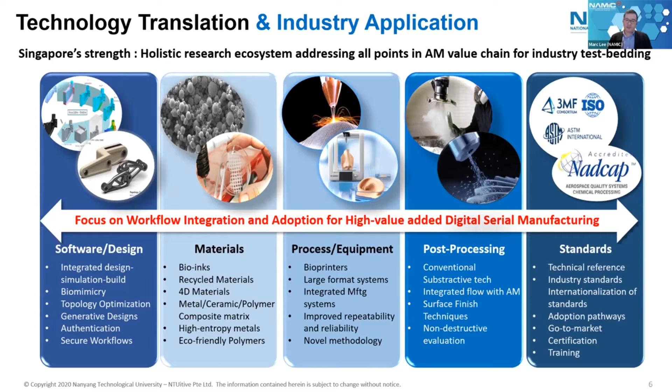Standards development is also another area which is strategic for the various domains, because only through standards development will demand by end users increase, and correspondingly, the supply will increase and the price for AM will drop.

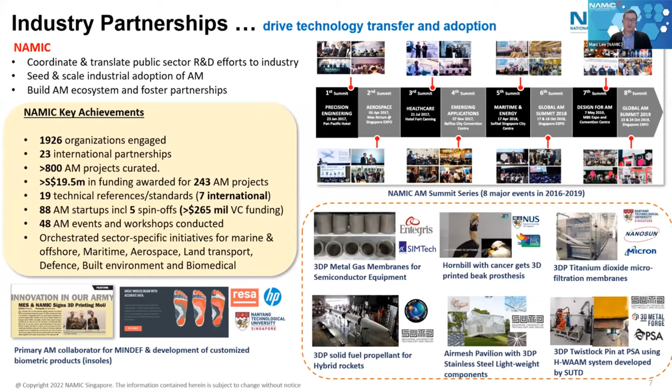NAMIC has also engaged in multiple industry partnerships. The main aim is to coordinate and translate such public sector R&D efforts, and eventually scale the industrial adoption.

The outcomes highlight all the various qualitative values we have created across various startups, enterprises, and MNCs. You could see the progress within the AM ecosystem from sectors such as M&O, maritime, biomedical, aviation, MRO, and semiconductor sectors. This shows the gradual AM adoption which is gaining momentum in Singapore.

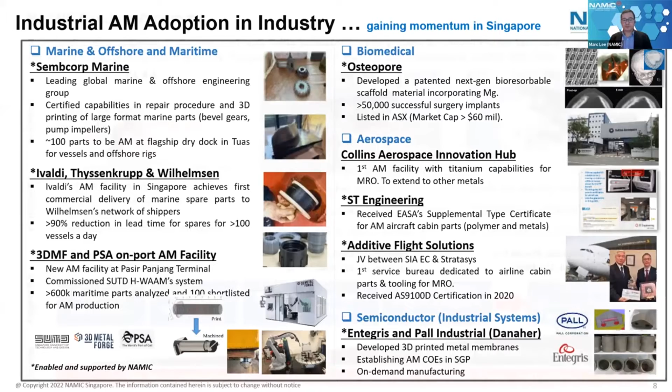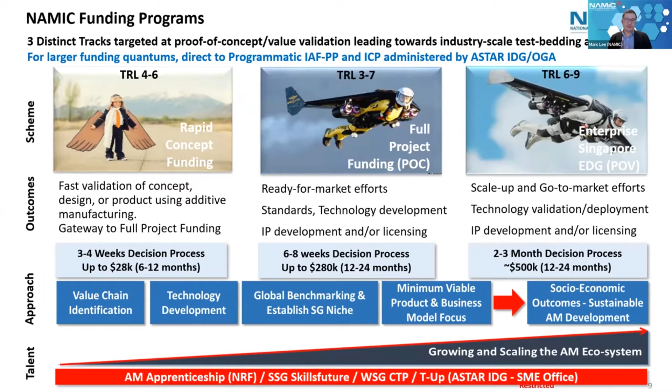In order to help Singapore-based businesses towards adoption at industry scale, NAMIC has various funding tiers for Singapore-based companies to perform R&D into these areas. The three tiers of co-funding are targeted at proof of concept and value validation.

NAMIC is constantly organizing various events to bring thought leaders and industry together. Pre-COVID, NAMIC would hold two AM summits per year, inviting international speakers. We also take part in various exhibitions within Singapore, once in May and once in October, as part of ITAP, as well as organizing the Startup Innovation Forum, which was held late last year.

It was a very refreshing restart to the MICE events for NAMIC, and we saw a very good turnout and very good interaction during the session. So with that, I've come to the end of my opening, and thank you for your attention.

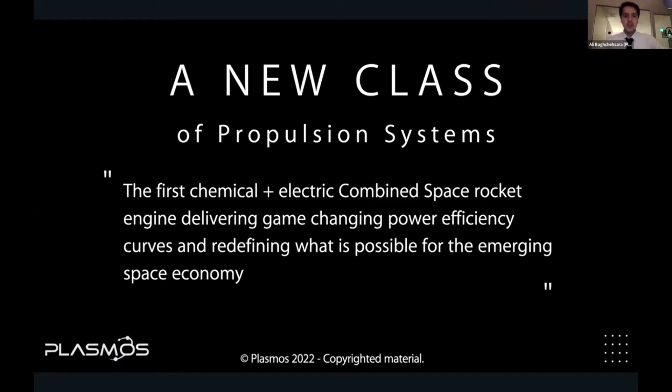But electric propulsion has been a rather new realization in terms of its capacities, being practical, being on satellites from Astrium in 2009, which was actually led by another team member of mine, Alan DeMeyer, at the time, or systems launched from the EP side in the last couple of years on OHP, which he was again leading, or smaller electric propulsion systems used for CubeSats and fairly small satellites. But what we are really doing is to combine these two for a new purpose. The good thing about an electric engine is that you can maneuver, you can run them for almost 6-7 months, go on deep space missions, and so this is a fantastic thing to have.

However, the problem that you have with an electric engine, and I'll get to it later on, is that it has a very small scalability. So you cannot scale the thrust of it that much. It only produces in the order of micronewtons, so much that you can hold the toilet paper still in Earth gravity. But what is the use of making a new type of engine like the one we are making, what we call CLEPS, Combined Liquid Electric Propulsion System?

And then we are coming in the game to say, okay, we can take it from here and go to a further destination, whether that's LEO, MEO, or GEO. So let's say go beyond. In second stage or third stage, so from a typical launch standpoint, when you go to lower Earth orbit and you want to go to higher orbits, that's also where this engine can be useful, just because it produces a certain order of thrust, like from 1 Newton to 25 Newton. I'll get to that as well.

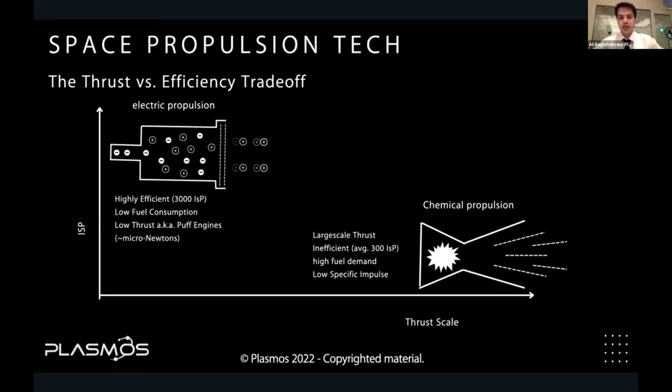On average 300 seconds ISP, it can be even higher, 350. But you cannot really go that much higher than that practically. So this fuel demand is really annoying when you want to say, okay, I want to use my satellite to go to another orbit, with constant refueling with a fuel that is not really available. However, in electric propulsion, you have access to, let's say, the solar panel. So what we are trying to do is to combine these two. Of course, I cannot get into so much detail of how we are combining these two things. There has been quite a long time of research despite just 6 months of operations of the company.

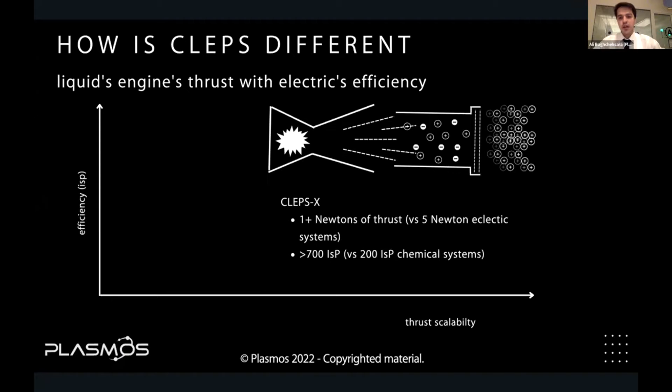Even some of my team members have been working on this more than I have been alive. So it's definitely an interesting journey to start and take practical steps very fast. And just to give you some key performance indicators, more than 700 ISP is what we are targeting to create, more than 1 Newton of thrust versus 5 micronewton. Sorry, micro is a word missing there in the electric. Electric is even written wrong.

But the complexity of producing such an engine is extreme. I wouldn't say I or my team are the first ones to try this out, but we are definitely the first ones to try it out this way. And by this way, I'll get more into it. But our engine has many layers to it. I'll get a little bit more into it.

So you can just see a little bit of this from the coils that are inside, from the specific cooling system. We cannot take the cooling systems and the methods that you can use to cool the entire engine of a normal rocket system, as is being done on the BE-4 engine, on Relativity's engine, and many others. We have to really take a different approach on those things.

Not that I know of those details, but very specifically, we cannot have a symmetric cooling system just because we have a very high temperature point at a very specific point of this engine, and that is more than 1,000 times hotter than anywhere else in this engine, which is making the manufacturing of it, making the cooling system, very weird.

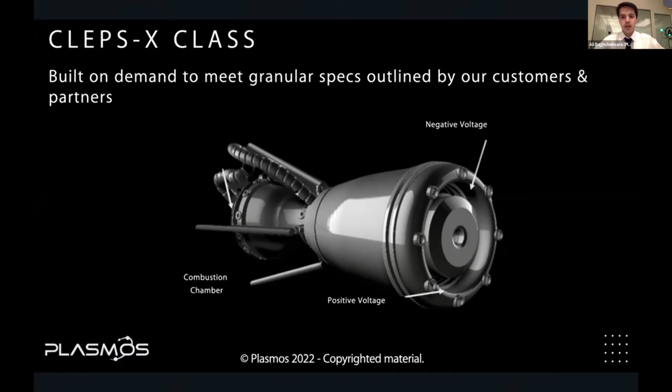So just one more thing, considering the cost of production and the operational aspect of a company, but also the operation of this engine, we are intending to have this engine made in a way that you can operate it more than 24 hours. Given that every spacecraft is different and manufacturers in the space industry are doing everything more or less vertically, we want to break into that vertical integration standpoint. So we are making a flexible system.

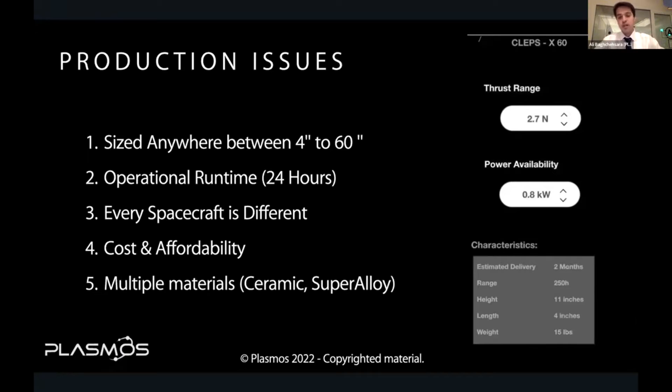When you talk about production, the traditional ways in CNC pressing, even small materials, small tubes, it's going to be extremely difficult if you want to scale for every single client up and down. But when you talk about additive manufacturing, things become slightly different and hopefully easier as we are entering production right now. We also have multiple materials, which is another topic for us. And of course, we want to have these engines made nice and high quality, affordable, but also reliable.

So I mentioned some of this layering. I just want to show you what I mean. We have a high voltage. I mean, when you go to some facilities and there is a nice sign that says danger, that's not going to end there for us. We have to really build isolation in there. Mark and I have had interesting conversations overnight about what technologies are available, what kind of material can be used on top of the things we want to print in superalloys, because that's not going to be electrically resistant, so that we can isolate things.

We are going to have coils inside the engine because we have to have a magnetic field. There is, as I said, one point where, just to give you a rough estimate, we are going to have more or less as much thermal pressure as you can imagine from 3 guys sitting on one piece of plate, making arcs there and welding something. That's how much we have on a very small fraction of our engine. So cooling it is extremely challenging and very different.

Our cooling system, when some of the experts look at it, they are like, geez, this looks really weird. And of course we have multiple layers of different things. So it's basically 2 engines made in one. That makes the production, of course, very difficult. However, we have come a long way.

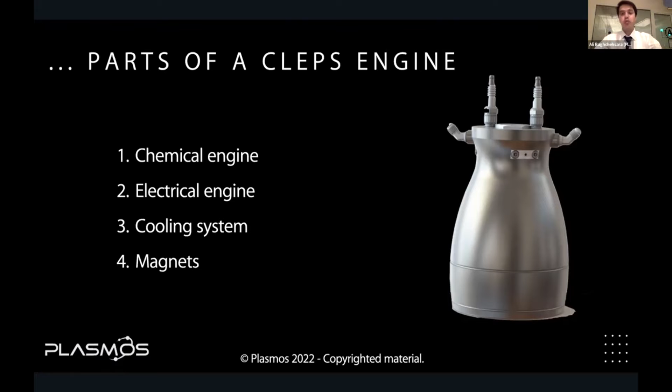So just to wrap up some of the difficulties that I was mentioning: the cooling system, the magnets, and both electric and chemical engine. You might have seen how crazy an engine for rockets looks. This looks so simple, and yet it has to have all of those elements inside it, because we are looking to have it a lot more integrated, just because we are starting from a green field.

And as I said, we just started legalizing our company about 8 months ago, September last year. But very recently, a former CEO of Airbus Defence and Space, a guy that I personally and professionally adore, has decided to join us as a chairman. So we have been making quite fast progress, both in terms of building a team of about 10 to 14 people, both advisors and others, but also really making progress in terms of designing something that becomes a reality

and not just a presentation. I remember last year I told Debra Werner, the same journalist that interviewed me, that I want to have a prototype before we start fundraising. And I'm very happy that I could keep that promise, as our fundraising just started on Wednesday last week. So it's almost a week, and we have been quite successful so far, raising a couple of SAFE notes, and we will hopefully push the boundaries in propulsion for space and going beyond. So I stop here.

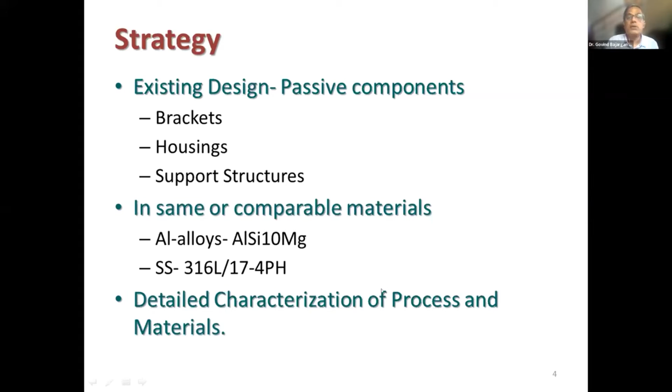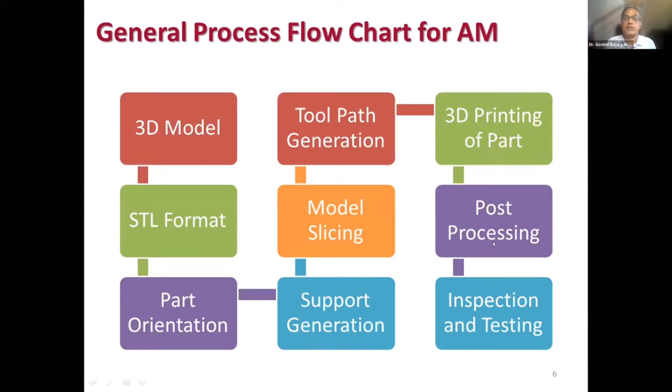So before going into our plan, let us just see briefly the flow chart of the AM process. The AM process, as all of you know, involves a 3D model which is converted into .STL format, and subsequently we decide the part orientation, support generation, slicing of the model, tool path generation, then 3D printing, post-processing, and the final inspection of the component.

So in STL generation, when the 3D model is converted into .STL format, the CAD model generally contains geometrical and topological information. But in STL, we lose the topological information. Only geometrical information is available. What STL does is it converts the whole surface to triangles, and it is denoted by the coordinates of the 3 vertices of the triangle, as well as the facet and facet normal. This is how the STL format designates the whole model.

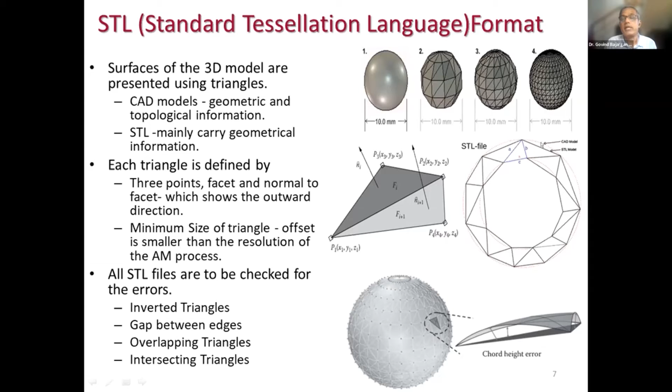But in conversion, we have many losses, and those losses generally are taken care of nowadays automatically by software. Earlier, it used to be done by manual correction. In STL conversion, we lose some information. Here you can see the CAD portion, and this is the STL designation. So we lose some information that we call chord height.

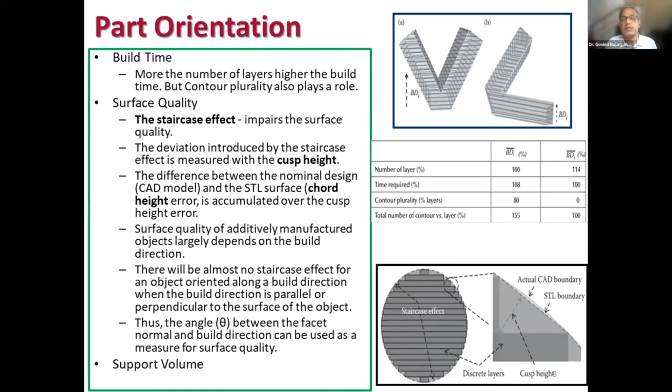When we go for deciding the part orientation, we generally would like to minimize build time and support volume, while improving the surface quality. So these are the main parameters under which part orientation is finalized. The surface quality is affected by the staircase effect. When volume is divided into different layers, it leads to a staircase effect, and it leads to one more error that we call cusp height. So the total error from the CAD model to the final print is cusp height plus chord height. That is the dimensional error we get.

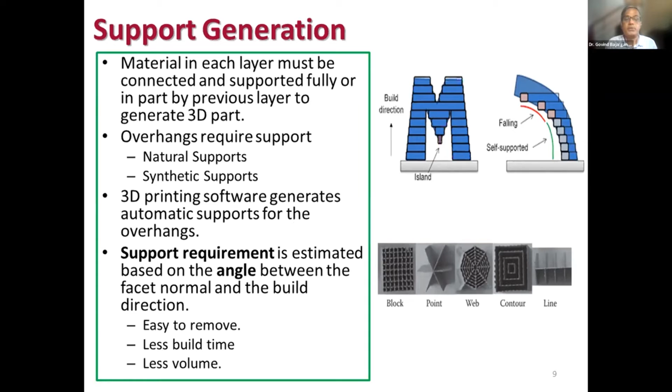So once the orientation is finalized, we have to build a support. Support means each layer must be connected and supported fully or partially by the previous layer. In many cases, depending on the orientation, natural support is adequate. But in some cases, we have to provide extra, artificial support. The criteria here are that it should be easily removable, we should have less build time, and it should consume less volume.

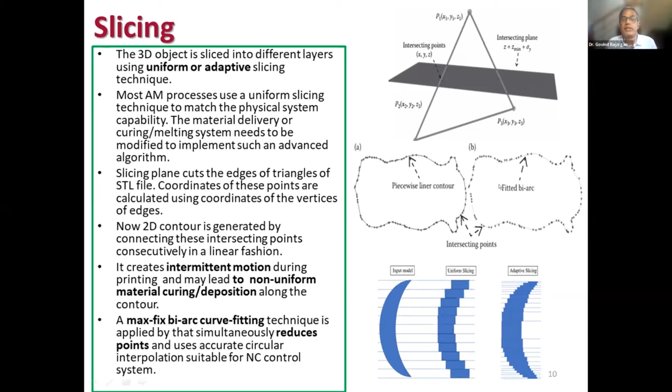Then we go for slicing. When the STL model is sliced, the slicing plane generates two coordinates for each slicing plane and each triangle, and combining all these coordinates, we get a shape which is to be scanned by the laser. But this straight point-to-point connection causes intermittent motion of the laser, which can cause non-uniform material deposition. So generally we go for curve fitting to make it smooth.

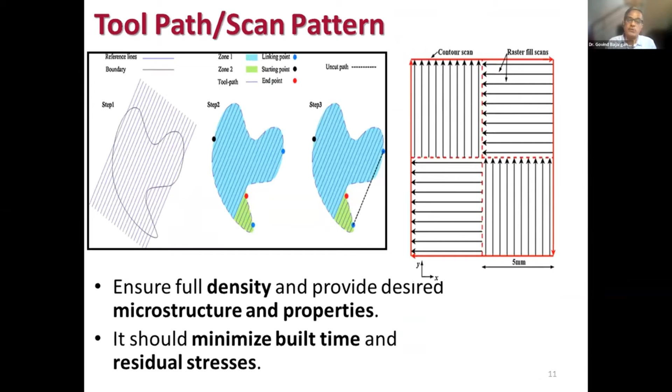So after this, we have to go for a tool path strategy. And the aim here is to get a dense product, control microstructural properties, and minimize stresses and the build time. So to achieve all these things on a machine, there are many references wherein a proposal is to have a benchmarking artifact.

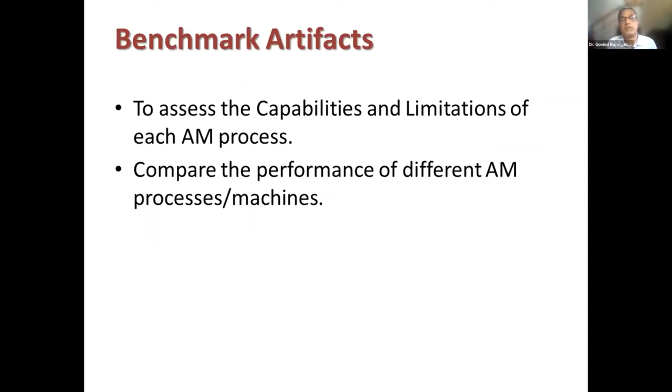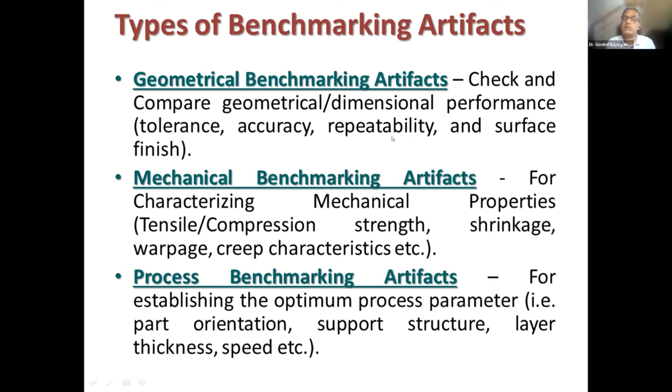So what actually are benchmarking artifacts? They help us in assessing capabilities and limitations of AM processes, and help us in comparing different AM processes and machines. There are geometrical, mechanical, and process benchmarking artifacts. A geometrical benchmarking artifact tells us about geometrical and dimensional performance, that is tolerances, accuracy, repeatability, and surface finish. Mechanical benchmarking is about mechanical properties, and process benchmarking about process optimization.

When we are designing the benchmarking artifact, what we are looking for is dimensional accuracy predictions, geometrical accuracy predictions, repeatability, minimum feature size which can be built, and the surface finish.

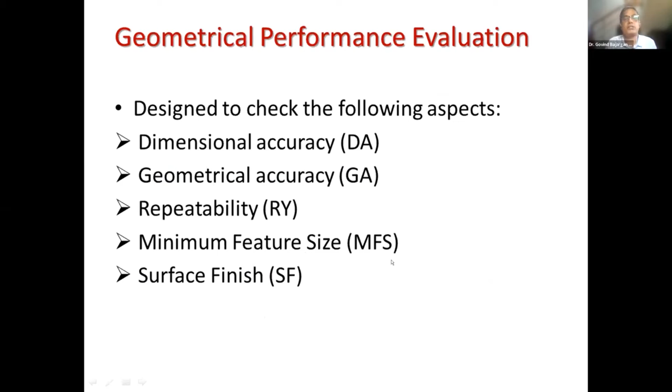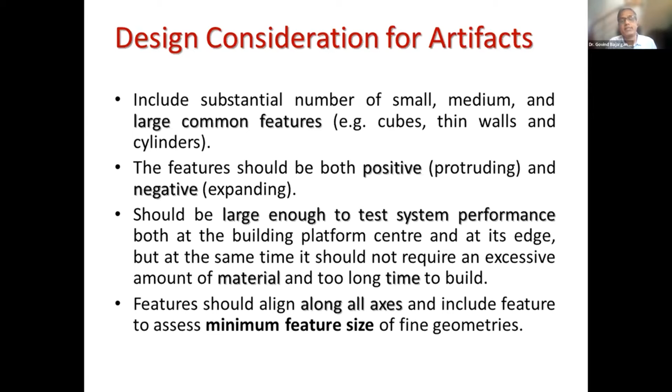The idea behind this is that we should have a large number of common features so that we can assess the repeatability and the dimensional tolerances. It should have both positive features, that is protrusions, as well as depressions, and it should be large enough that we can call it reliable data. Also, it should consume less material and less build time. The features should be oriented in almost all the axes to have assessment based on direction.

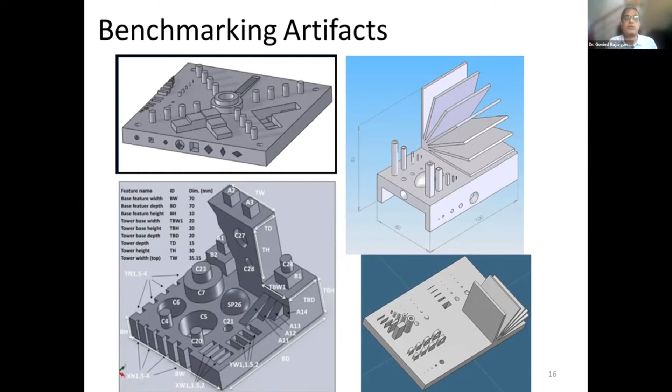In mechanical benchmarking, when we started looking, there were two standards which gave us some idea. One is AWS D20.1, which talks about building test coupons at all 8 corners of the build volume as well as in the center, requiring coupons in X, Z, and 45-degree directions, and also thick and thin. A thin coupon is of the order of 1 mm thickness, and thick will be 6.5 mm thickness or higher.

So with that, we generate data based on the location, thickness, and direction of the sample, to see what kind of scatter we get in the property. ASTM talks about building 5 coupons at 5 different locations on the build platform along with density coupons. So what we decided is we optimized that approach and went for some 25 to 30 coupons along with density coupons.

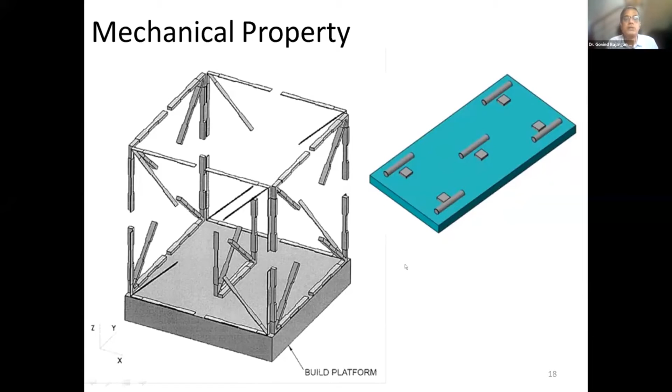This result I am sharing is for 316L, where around 25 coupons were printed, and we saw that 2 coupons in the Z direction showed lower elongation. Otherwise, properties were more or less consistent. When it was analyzed, it was found that it has something to do with a parameter called dosing factor, wherein material powder is added in front of the recoater blade, and the quantity got affected for some reason.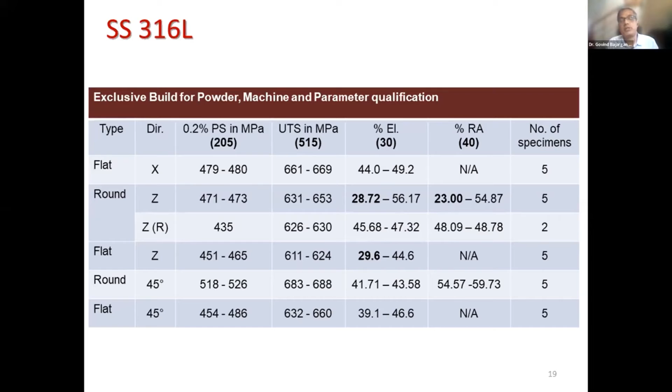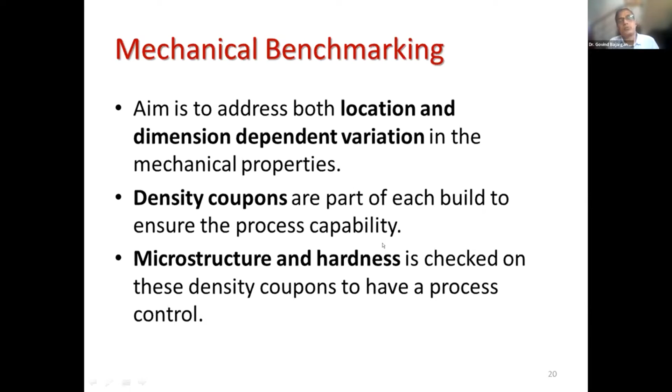So these kinds of things can be caught, and we can address these points if we have a proper benchmarking process. What we aim is that location and dimension dependence of the effect on mechanical properties can be assessed. A density coupon in each build, whether for qualification build or component build, can be added, so that we get assurance that the parameters are giving the required density, and those coupons can be used for microstructure and hardness as a kind of process check.

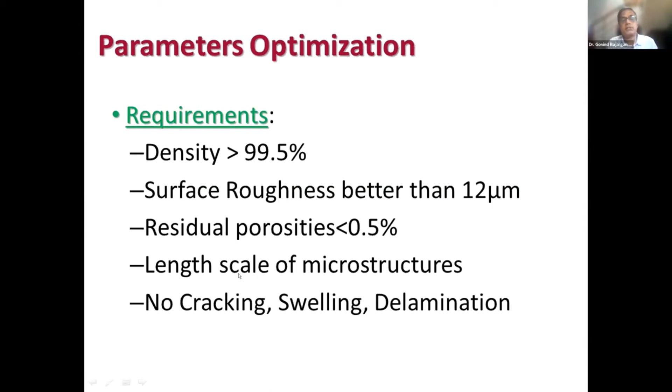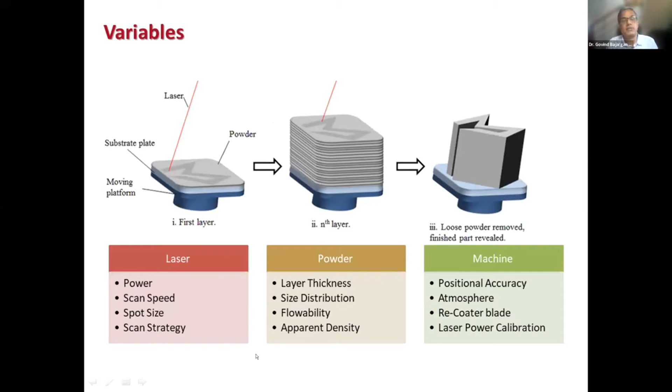The third point was process optimization. This is a very tricky process, because the requirement we put here is generally density of 99.5% or higher, surface roughness of 12 micron or better, less porosity, defined microstructures, and no mechanical damage. The process variables, as you all know, include laser, powder, and machine dependent variables, but mainly the ones we deal with are power, scan speed, and scanning strategy, that is hatch spacing and so on.

When we went ahead with building single track or single wall structures over a wide variation of power and scanning speed, this helped us in delineating the zones of lack of fusion, keyhole formation, and balling effect. With that, we can arrive at the operating window which gives us a consistent deposit, a smooth wall with a reasonably good surface finish.

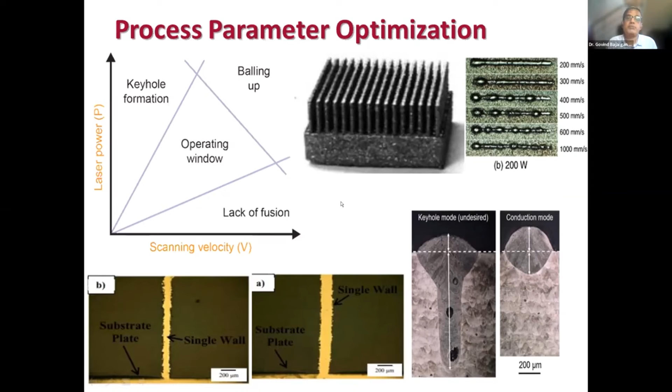So then our aim is, within this optimized window, to find what should be our parameters, and then we have to work on hatch spacing. There are models available. Here is one model written in Python which helps us assess what should be the hatch spacing using data like melt pool geometry.

If you see the gray color in the model, it gives us a hint that the dark region indicates a lack of fusion or porosity, while the light region shows that melting has happened almost 3 times in that zone. So there are zones where melting occurs more than once, and there are zones where no melting occurs, that is lack of fusion.

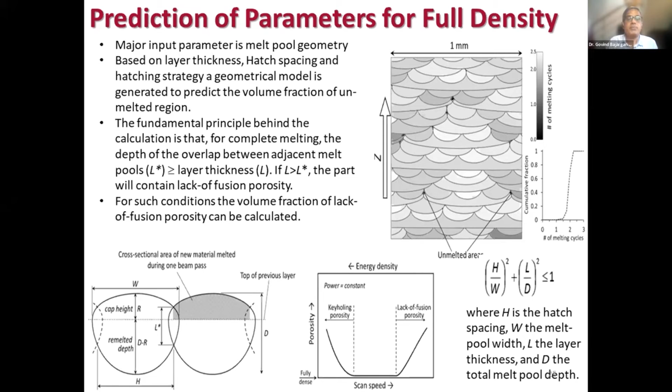By varying the hatch spacing, we can control the zones where lack of fusion is happening. Here we modeled and showed that there are zones where single-time melting occurred, zones where double melting occurred, and zones where melting has happened three times in the process.

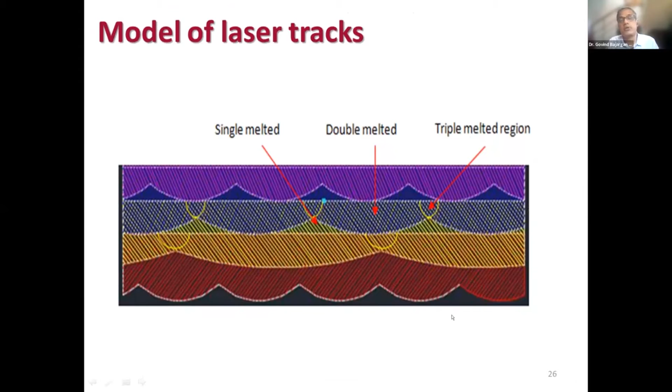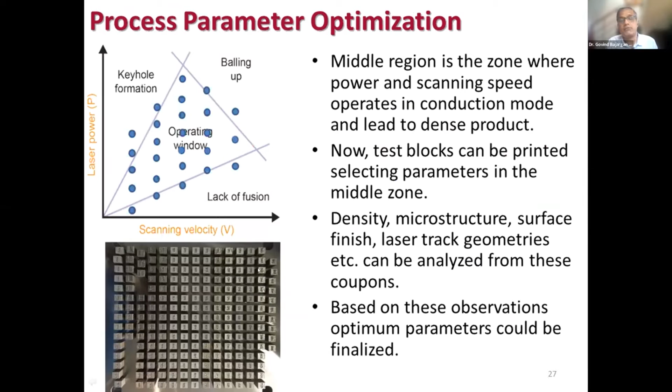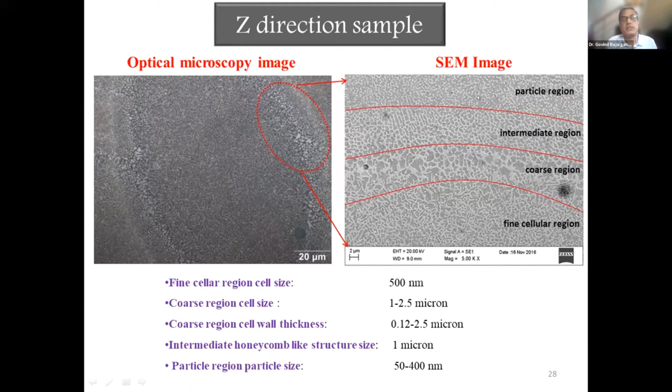So that is where we see partial melting. And the particle zone, where the cellular wall has converted into fine particles, is the heat affected zone away from the partial melted zone.

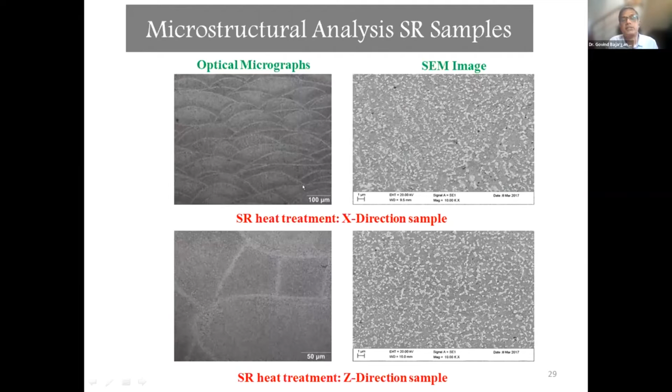If we stress relieve such a structure, we get a coarse particle, but coarsening is higher in the HAZ zone. And when we test it in the Z sample, we'll always see a failure along this HAZ zone.

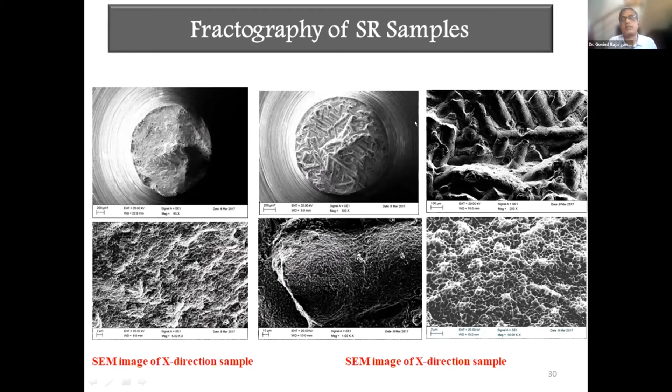So to take care of this, we have to have a proper post-processing plan, meaning heat treatment has to be properly done and we have to select a proper heat treatment cycle. Here are some properties: where stress relieving is done, we get elongation of the order of 18%, which is never thought of in aluminum silicon cast alloys.

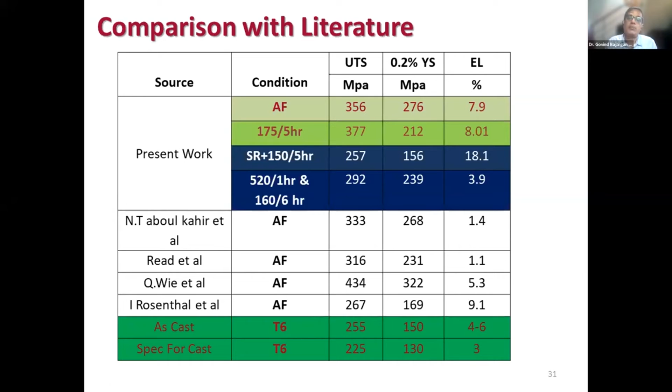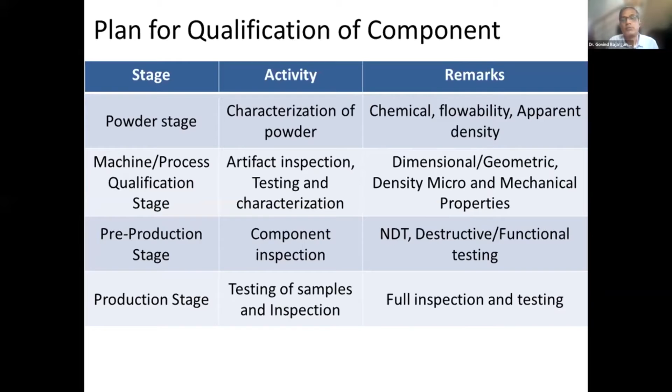Based on this, we have formulated our strategy with different four stages of characterization: powder stage, machine and process stage, pre-production stage, and production stage. With these stages of processing, we have established a process in our system to induct the AM program. Qualification of all AM components to build confidence goes through qualification testing, that is either functional test or destructive test.

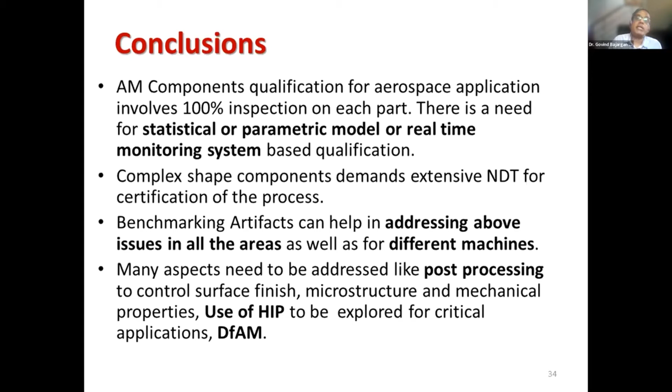So I'll conclude my talk: AM component qualification in aerospace calls for 100% inspection. But there is a need, because for complex components doing 100% NDT is time consuming and it defies the gain we get from AM, which is short lead time. So there is a need for statistical and parametric models and real-time monitoring of the system. Benchmarking is really a good thing, and we can enhance it in process optimization also. Post-processing like heat treatment and DFAM are really good things we have to explore a bit more.

Velo3D was founded in the United States in 2014 by Benny Buller, our CEO, standing in front of the Sapphire machine.

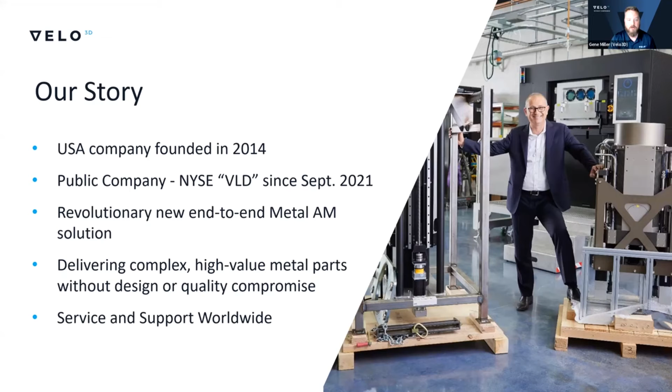We went public in September 2021 under the ticker VLD, poised to deliver complex, high-value metal parts without design compromise or lack of design intent in the final application. We want engineers' true designs and optimized ideals to be implemented in their real parts as manufactured.

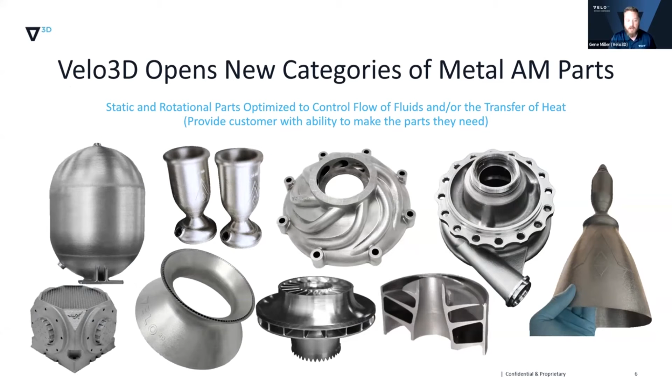Here's an example of some parts we've printed in the past. A lot are static and rotational parts, many optimized to control the flow of fluids and the transfer of heat. We're really opening up the design space for what is manufacturable, even more so than in a traditional laser powder bed fusion system.

Here are some examples of things we've printed for the aerospace and space industries. This is a quad-direction thrust vessel for the lunar excursion module, actually used on the Apollo program back in the 60s. This part has now been optimized for additive manufacturing. If you look at it, it's manufacturable on a typical laser powder bed fusion system, but there's a lot of opportunity to further reduce weight with Velo technology.

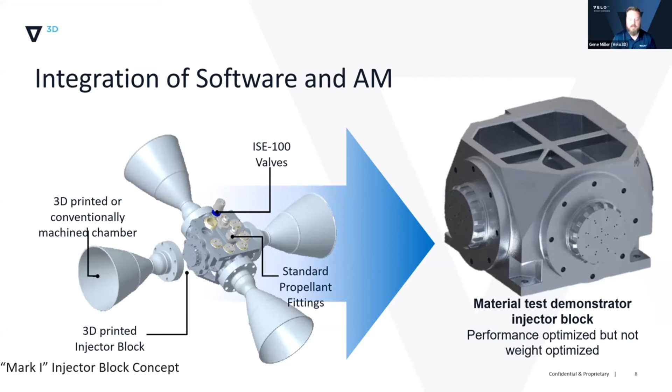That's what we did with this part. We took the traditional laser powder bed fusion part, printed on a legacy platform, and did further weight optimization to eliminate unnecessary mass. To maintain structural rigidity, we implemented a lattice structure inside the extracted volume. This enabled us to print the part with a 67% overall weight reduction without sacrificing factor of safety, and dramatically reduced manufacturing costs.

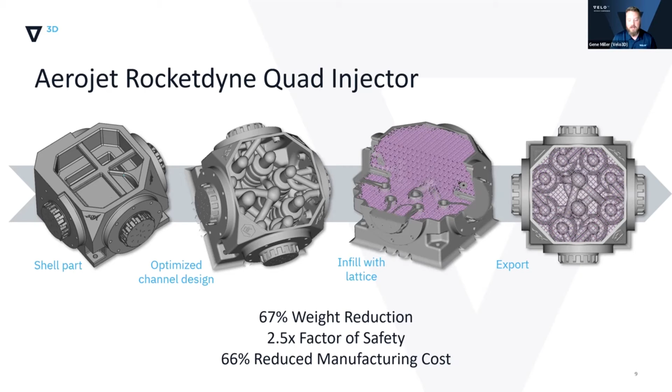The original part consisted of many different pieces, a lot of assembly steps, and many other sources of failure, to be honest. This would be practically impossible to machine—if you could machine it at all, I have no idea how you could do it. This lightweighting lattice really makes the machining process impossible.

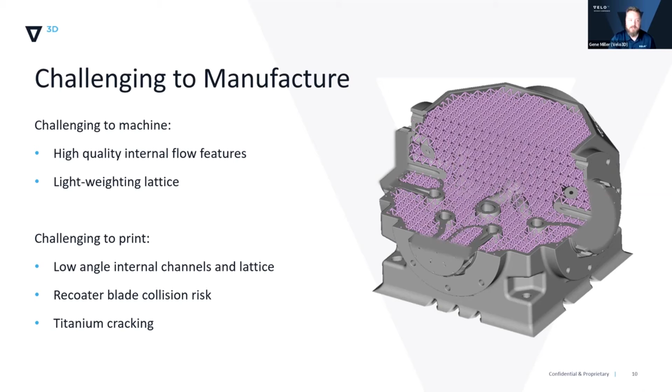If you tried printing this on another system, you'd still have challenges with the internal channels. The lattice structure itself would suffer from recoater contact, which Velo3D doesn't have to worry about. There's also the high susceptibility of titanium to cracking, but we have an in situ stress reduction technique that ameliorates that risk in titanium parts.

So how do we do this unique printing? We've built preprint software with the ability to detect geometric features like bulk and low angles and lattices, and apply specific laser parameters to print these geometries without needing support material in most cases. This is all done automatically by the software—the user doesn't have to be aware of these process applications.

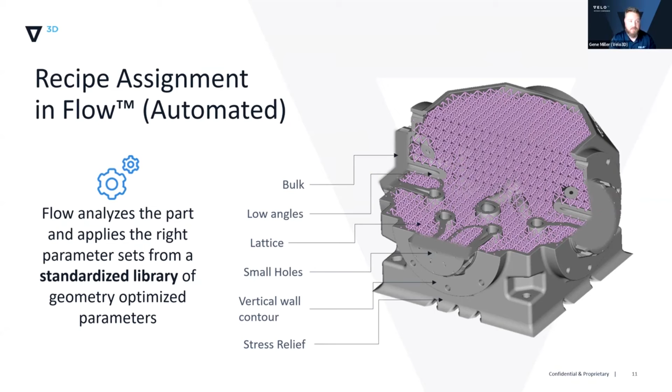This is the part we printed in solid titanium, with the very lightweight lattice structure on the inside.

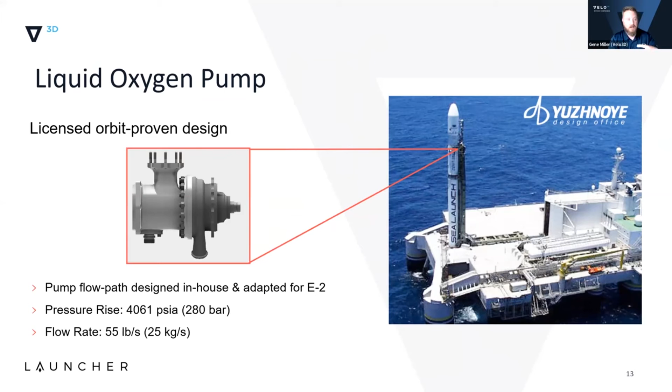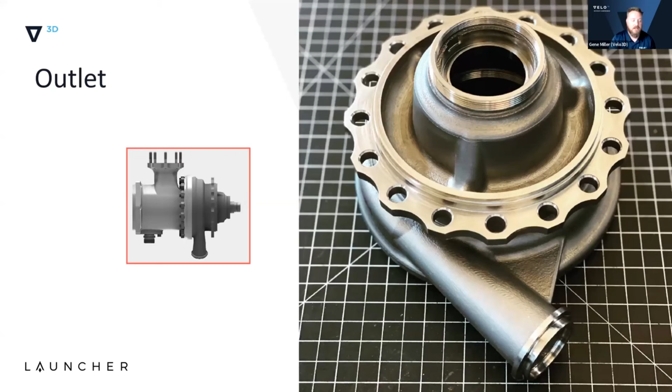Another example is a component for a liquid oxygen pump for Yuzhnoye and Launcher. We printed two components: an aluminum housing and an Inconel outlet for the pump. This pump was assembled and tested—the inlet is the aluminum part on the bottom, the outlet is the Inconel 718 portion on top, tested at cryogenic temperatures by Launcher and ran for 2 minutes.

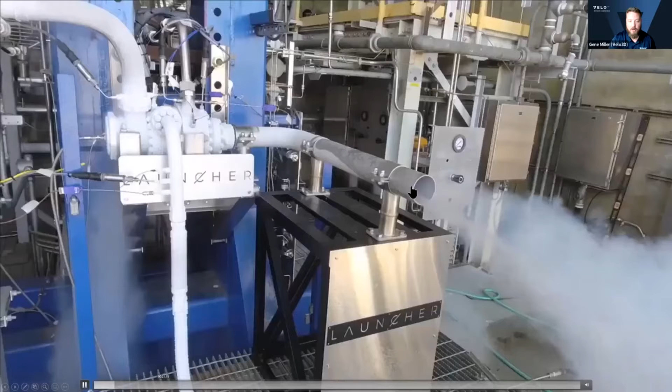This is a great example of first article success—right out of the gate, the pump ran beautifully for about 2 minutes. I won't make us go through the entirety of this video, but here it is starting up now and running for approximately 2 minutes until it shuts down. It was a great first article success for them; they learned a lot without any unexpected anomalies.

As well as the pump housing, Launcher has printed and implemented a lot of Velo parts on their orbiter system—thrust nozzles, propulsion and fuel storage, as well as structural components and injectors. They're really utilizing every bit of optimization ability the Velo technology offers.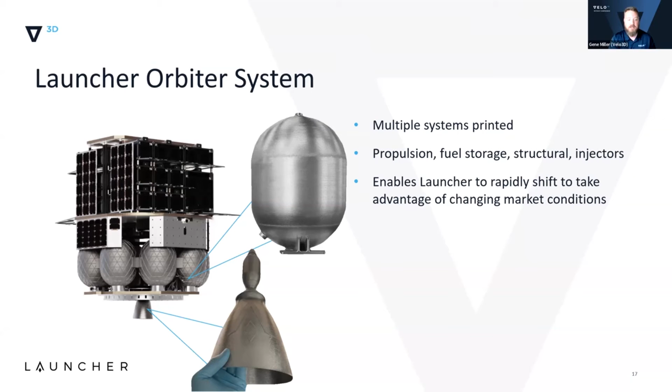So how do we really do this? First of all, it's not just the printer, it's not just the preprint software, it's not just the process, it's all of these things working together. We designed our own preprint software to apply our own process to the laser print file that is brought over to our own 3D printer. We call it the Sapphire, where the printing actually occurs.

Now, this printer has about 1,000 sensors on it, gathering data throughout the printing process, and our quality validation software called Assure quantifies all of that in a digestible report at the end of the build. There's also real-time interaction where you can check your print as it's occurring in real time with the Assure software.

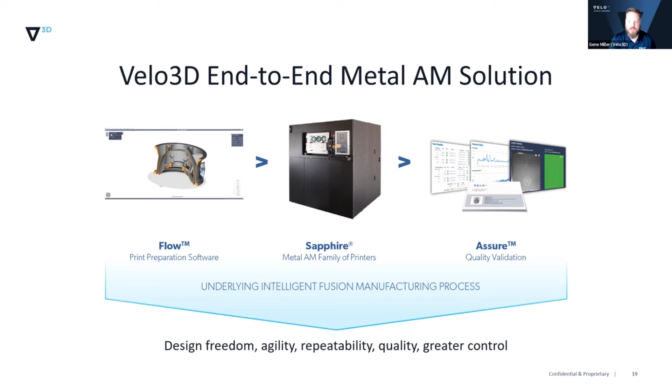The Sapphire printer family consists of 3 platforms. There's the traditional standard Sapphire. That's a 315 millimeter diameter build volume by 400 millimeters tall. There's an option to extend that up to a full 1,000 millimeters or a meter.

And then the XC is our extra capacity platform, using a 600 millimeter diameter by 550 millimeters tall. And that is actually 8 1-kilowatt lasers, where the Sapphire machine is only 2, but it's still the same optics, same technology, same recoating, same processes. So scaling from the Sapphire machine to the Sapphire XC is rather seamless.

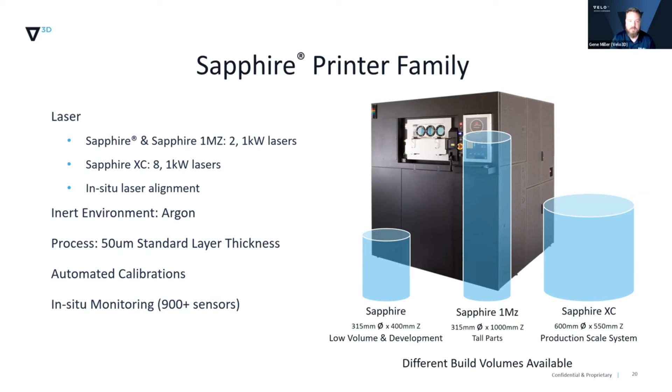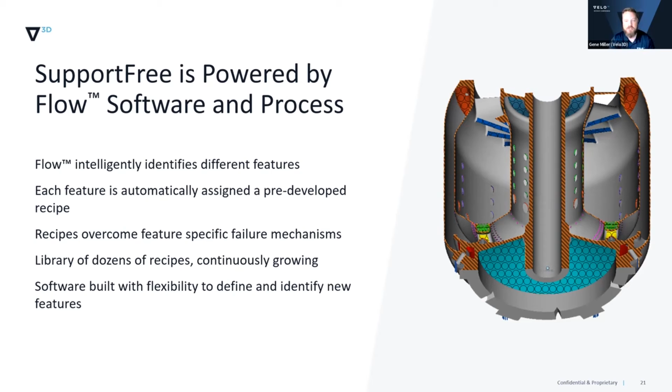So like I said, Flow is our preprint software, and it has the ability to detect unique features and geometries on our parts. As you can see here, the low angle features are recognized, the thin walls, the small holes, the lattice. This is all detected by our algorithms and we apply our specific developed laser parameters to achieve printing of these features without the need for added support material.

Here's a great example of what we're talking about. We print a lot of rotational components like shrouded impellers. And you'll see the conventional approach is either to fill the inside of this with support material or actually tilt it up on its end, which is a compromise because you are really just kind of pushing the problem elsewhere inside the part, and you're going to struggle with circularity and lack of concentricity when you go to balance this rotating component.

The right way to do it is with the Velo solution, where we would print it flat on the build plate. We don't have the need for any support material on the inside, thanks to our unique low angle processes. And after removing a constraining wall around the outside in a simple lathe operation, you can have an unsupported part, and it's still circular and round and able to be rotated at high speed.

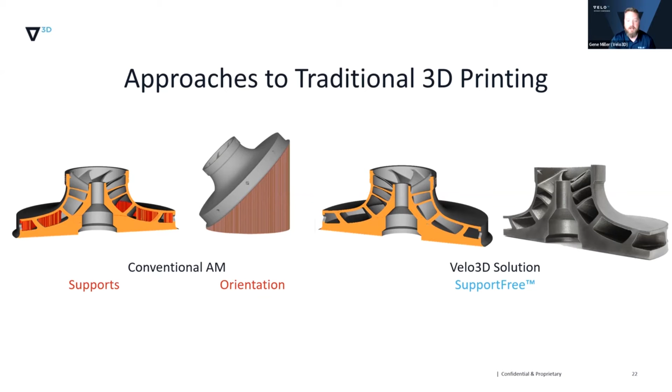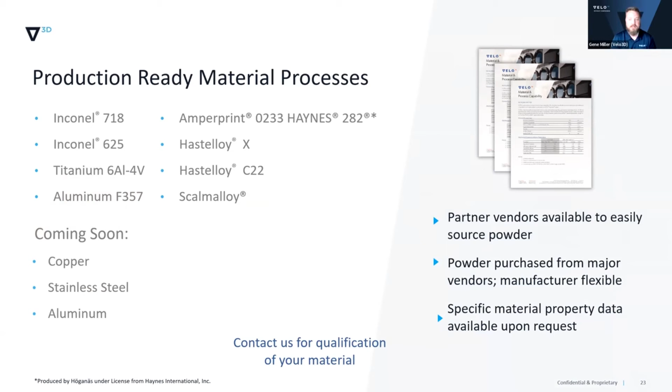So these are alloys available today. Coming soon are copper, stainless steel, and more aluminum alloys. All of our material properties are available on our website. You can go to velo3d.com and download them for free at any time. We also don't sell any of our powders. We don't mark them up. So any of our customers can find their own powder, source their own powder. As long as it is within our spec, it's open source.

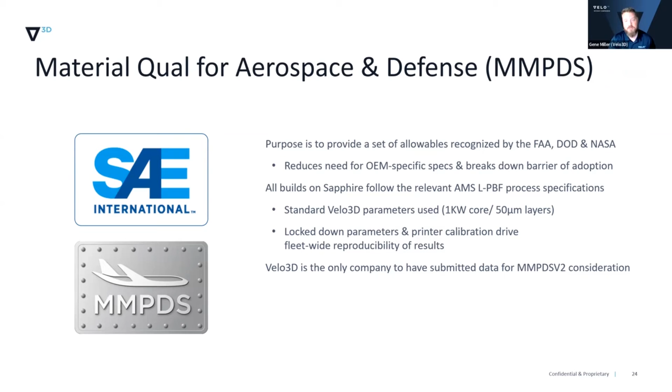So Velo3D is the only company that is actually engaging the MMPDS material qualification for aerospace and defense. This is something that we are really passionate about, and one of the few companies that have really tried to tackle this. It's scalable through many machines, and I'll get into that as well. But we are not just looking at qualifying material that comes off of one machine. We're trying to do it for all machines across our fleet.

And the idea of the golden print file is something that Velo3D does that is very unique in the industry. We have a scrupulous qualification process, as well as active tool health checks that are ongoing to ensure that the machine is functioning nominally and able to print the desired outcome with one single print file. And I'm not just saying that we can do this, we're actually doing this with customer parts today. We create one print file and send it to multiple customers, and they print that file with the same result. So this is actually being implemented today.

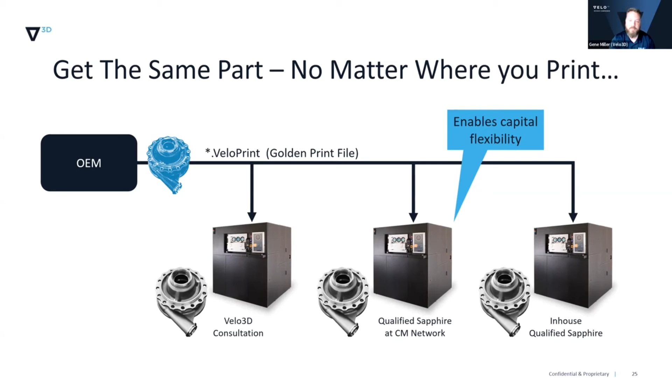So to sum up real quickly, we really want to enable our customers to focus on the solution, not get lost in the manufacturing headaches and the shortcomings that make them compromise their design. Even on the most advanced aerospace geometries, where optimization is key and you really need to push the boundaries of what is manufacturable, we really want to open up that design space. We want to adhere to the strict aerospace standards for material properties, hence our involvement with MMPDS qualification and certification.

Like I mentioned before, the fleet level standardization of processes and calibration is some of the best in the industry. We're not brushing problems under the carpet. We don't have dead zones on our build plate. The flow is characterized. We're really trying to solve all the problems. The processes that we would engage a customer on are going to be the identical process that we would use in production. So again, the scalability there is really seamless to go from development to production in one easy step.